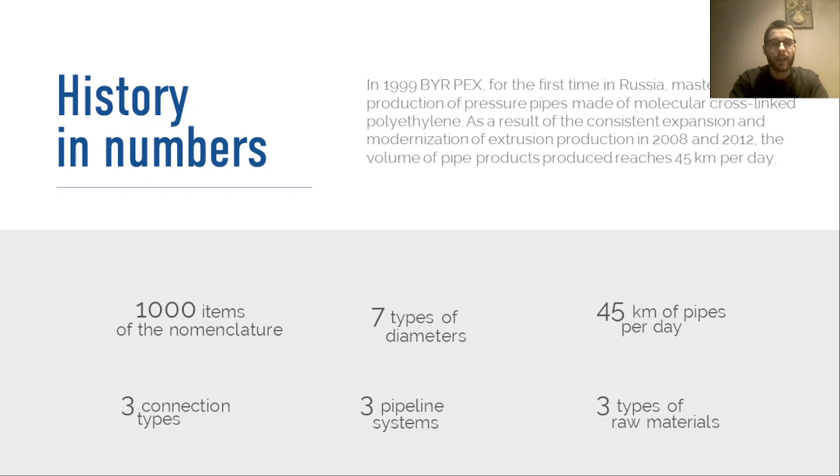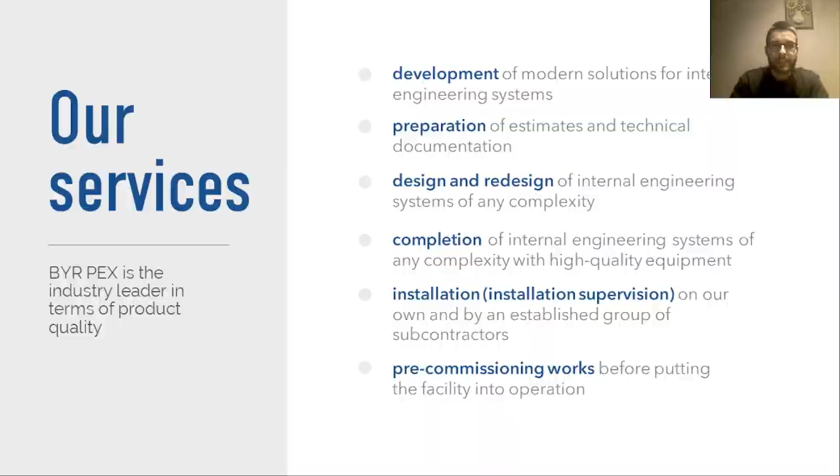Now let's switch to the general activities so I can provide you with a quick but more detailed explanation. Research: from 2001 until 2008, we conducted in-depth studies of the long-term strength of cross-linked polyethylene pipes when working with a coolant at a temperature of 95 degrees Celsius. The research had no analogues in the world.

Innovation. Research activities combined with accumulated experience help us correctly formulate requirements, select material, and direct engineering thought to solving problems. This is how simple solutions appear, which are rightfully called innovative.

Production. The production is deployed on its own area of more than 2,000 square meters and is constantly developing. The territory of the plant is located in Moscow region, 17 kilometers away from Moscow.

Design. The corporation carries out work on the design of heating systems, water supply, and other internal engineering systems. We are partnering with design companies in many cities of Russia and abroad. We have designed more than 1 million square meters of areas of various purposes.

Sales. As I have said earlier, the distribution network is spread around the whole country. However, we are still exporting our products to a few neighboring countries such as China, Belarus, Kazakhstan, and Uzbekistan.

BYR PEX took part in the ISH Messe Frankfurt exhibition in 2017 and 2019, where we managed to attract a lot of attention to our unique pipeline system. However, due to COVID and further circumstances, we didn't manage to establish a stable partnership.

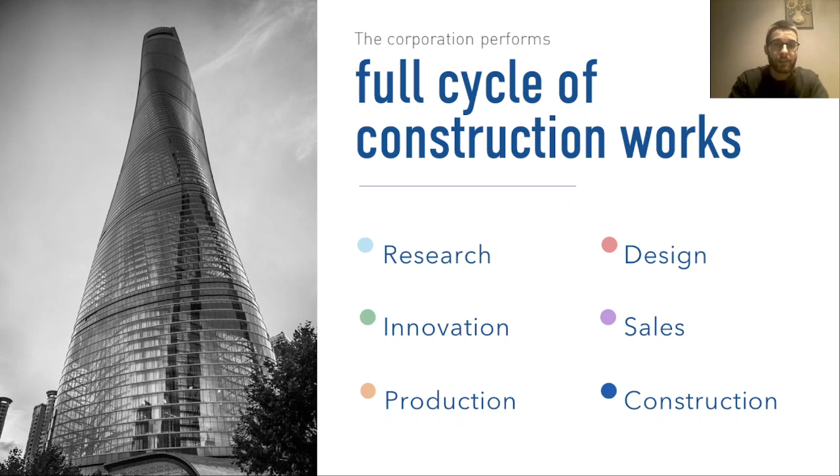I forgot to draw your attention to the building represented on the picture on the left-hand side. It is the second tallest building in the world, called Shanghai Tower, and its heating system is mounted using BYR PEX's premium pipeline system. I guess I've mentioned enough about the company, and I would like to present to you the product lines.

As you may see, we produce 3 pipeline systems, each of which corresponds to a certain purpose with certain operational conditions. Depending on the scenario of your specific design project, we will provide you with the most optimal solution.

As it is stated, BYR PEX's Optima is the most budget system. That is why it is the most optimal choice for most household needs. However, due to reduced wall thickness, it mostly suits the needs of horizontal distribution of water and heat supply.

BYR PEX's Standard system is the best ratio of price and quality. It corresponds to the maximum operation class of the standards. However, it demonstrates strength characteristics above its counterparts.

BYR PEX's Premium system simply doesn't have any analogues because it is the only PEX pipe in the world that corresponds to the real maintenance conditions in countries like Russia, where the length of the heating period is 3 times longer than in Europe and the coolant temperature is 25 degrees higher.

In order to believe in my statements, we recommend viewing our test playlist on YouTube, where the advantages of our samples over pipe competitors is clearly demonstrated.

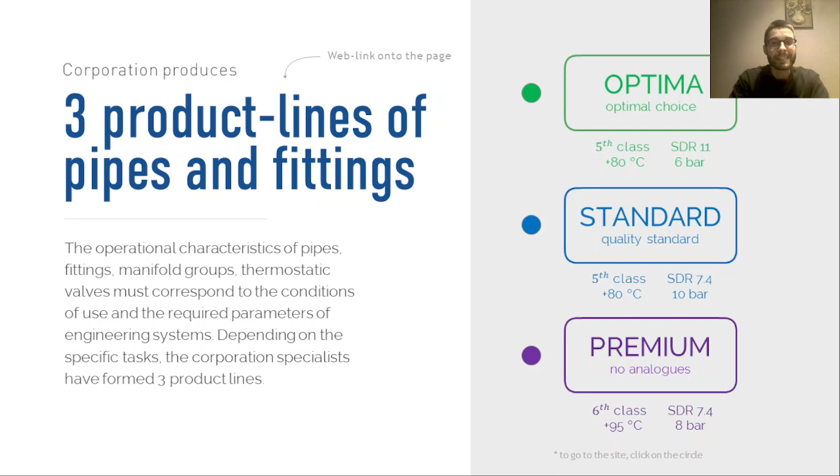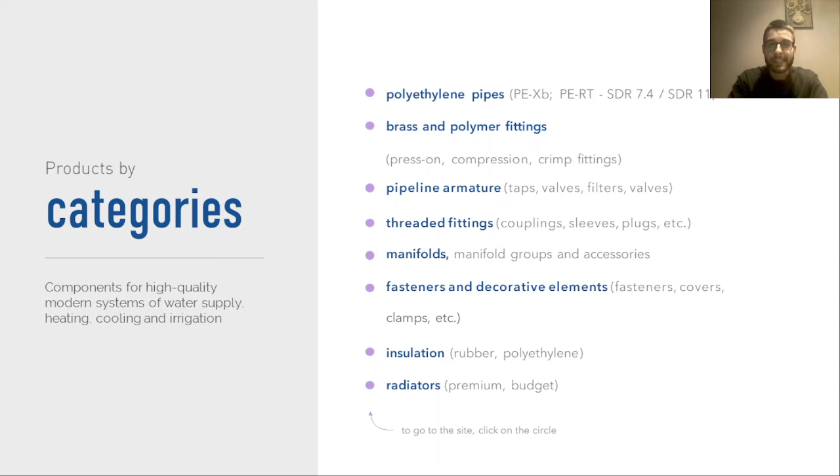Now you can see the range of the main assortment of BYR PEX, including the products of our own production, as well as products of our partners that are always available for our clients. Here are PE pipes that could be produced from both cross-linked polyethylene and polyethylene of raised temperature resistance, brass and polymer fittings with different connection types, pipeline armature, manifolds, fasteners, decorative elements for hiding open areas, insulation and radiators. However, the company is capable of supplying any types of engineering components depending on the individual circumstances of your project.

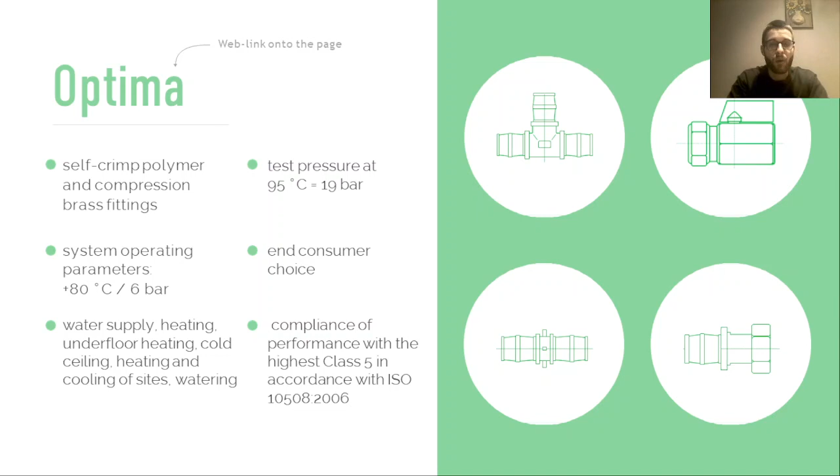And finally, we will discuss the Optima system in more detail so you may consider whether it suits your local needs. The BYR PEX Optima pipeline system includes pipes either made of PE-Xb or PE-RT material, either cross-linked polyethylene or polyethylene of raised temperature resistance, self-crimped fittings, sleeves, and compression fittings. The operation pressure and temperature of the system are 6 bars and 80 degrees Celsius respectively. It complies with the highest class of operation according to ISO. The system is appropriate for pretty much all water needs.

Let's first discuss the self-crimp connection, which is patented by the company in 2015. Such fittings are made of brass or polymer. They are used to connect pipe sections to each other as well as to switch to a thread. This type of connection belongs to the category of non-detachable, that is why it is permissible to hide it inside the walls, floors, ceilings. The mounting process is very straightforward and certainly doesn't require any special skills.

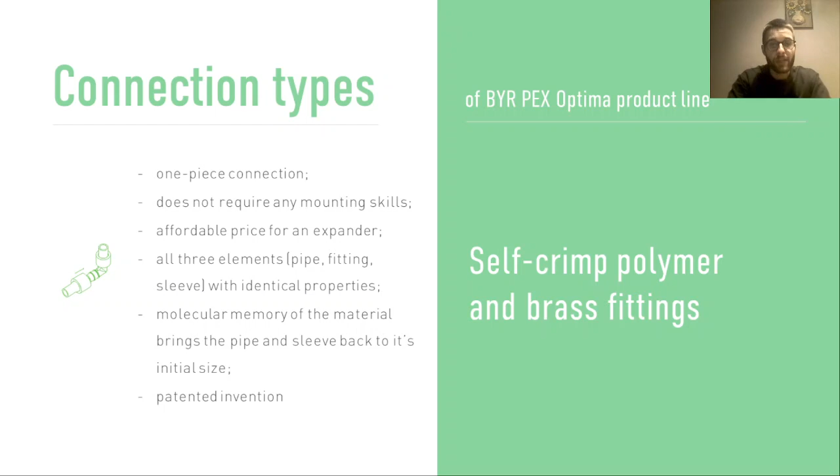Compression fittings are made of dezincification resistant brass, grade LS59/1. Normally, such type of connection is used in open areas, so it will become easy to maintain due to no need for a tool as it's mounted with wrenches. The connection doesn't include any gaskets or rubber rings, so you may be sure that it will serve you long and true. Such connection belongs to the category of detachable, that is why it is not allowed to hide it inside the monolith.

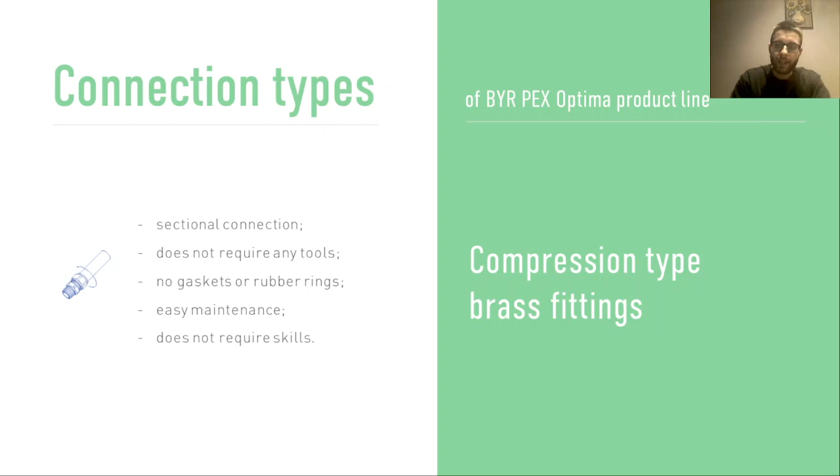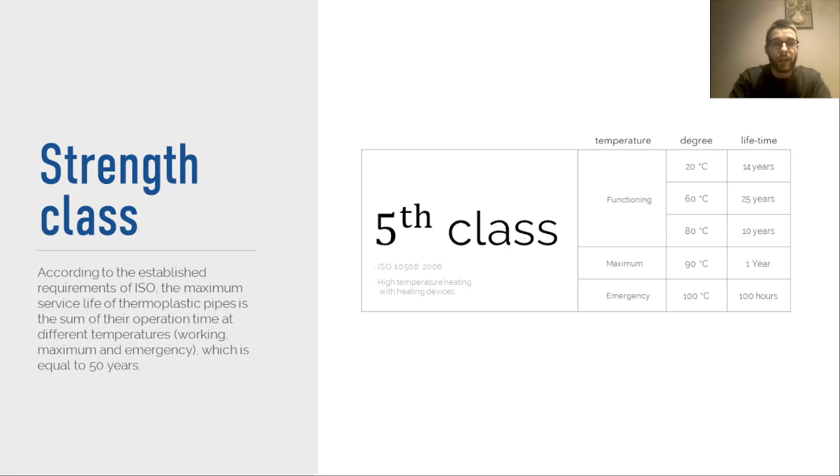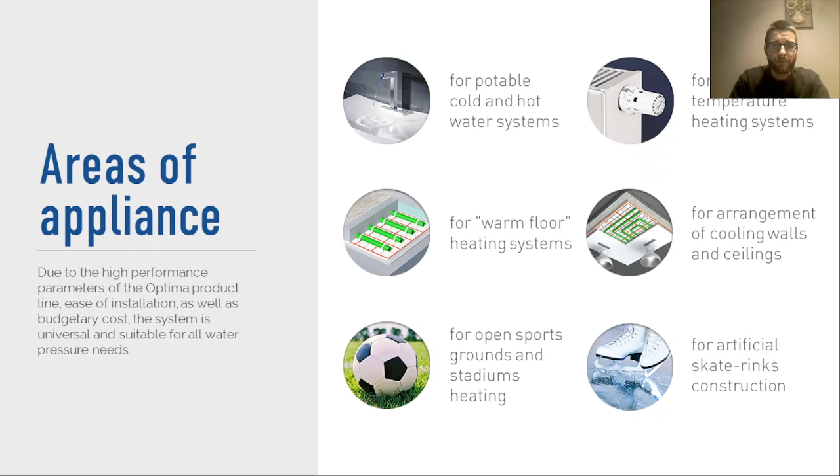So now let's summarize the advantages of the PE pipelines, of the polyethylene pipeline systems, compared to the outdated solutions such as polypropylene pipelines, considering the fact that PE pipes are mostly used in pressure systems.

PE pipes possess a higher temperature resistance, up to 95 degrees Celsius as the operating temperature. It is possible to wind coils of PE pipes up to 800 meters, which certainly saves money, the cost of delivery, and the storage. So it helps to minimize the waste on the construction site.

Plasticity of such pipes allows avoiding unnecessary connections, thereby reducing the risks. As mentioned earlier, connection types for PE pipes are allowed in the monolith, which increases the aesthetics of the system. PE pipes have a smooth surface, that is why they do not overgrow, therefore there is no narrowing of the internal section of the pipe. Connection methods do not require electricity on the construction site. And finally, the lifetime of PE pipelines is 50 years and longer, depending on the maintenance conditions.